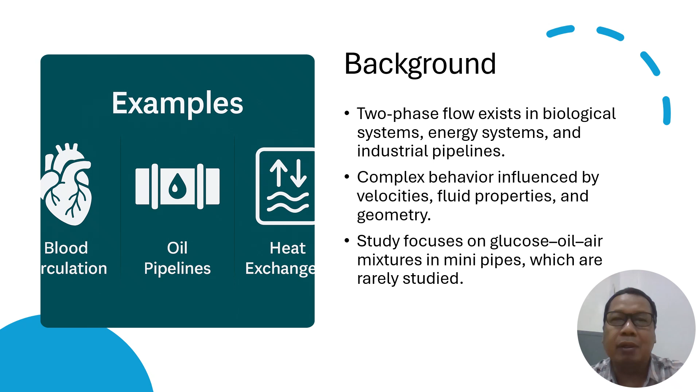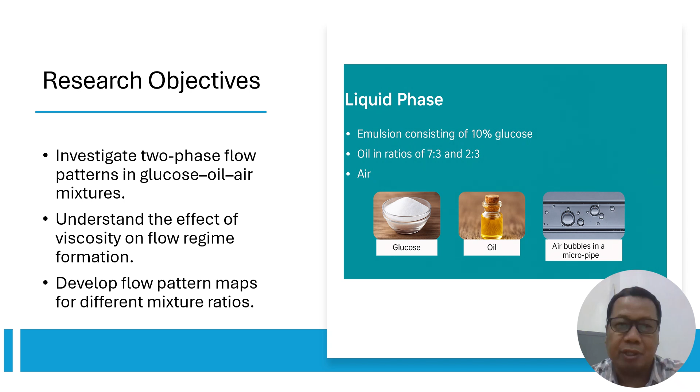In this study, we aim to investigate the flow patterns that occur in glucose, oil, air mixtures, understand how viscosity affects the formation and stability of flow regimes, and develop flow pattern maps for two different mixture ratios to support future microfluidic applications.

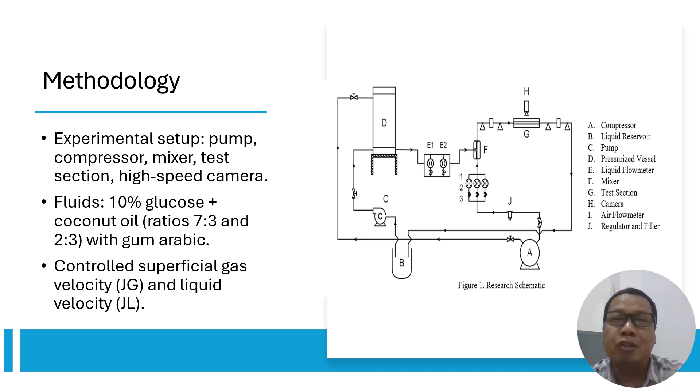Ladies and gentlemen, our experiment involves a detailed setup that includes a pump, compressors, mixers, test sections, and a high-speed camera for visual observations. The working fluids were emulsions of 10% glucose and coconut oil with two volume ratios, 7:3 and 2:3, stabilized using gum arabic. We carefully controlled superficial gas velocity and superficial liquid velocity to capture a range of flow patterns.

Ladies and gentlemen, our results showed that the 7:3 mixture exhibited a wider range of flow patterns, including plug, bubbly, slug annular, annular, and churn flow. And the 2:3 mixture displayed only plug, bubbly, and slug annular patterns. This indicates that higher viscosity in the 2:3 mixture reduces the diversity of flow regimes.

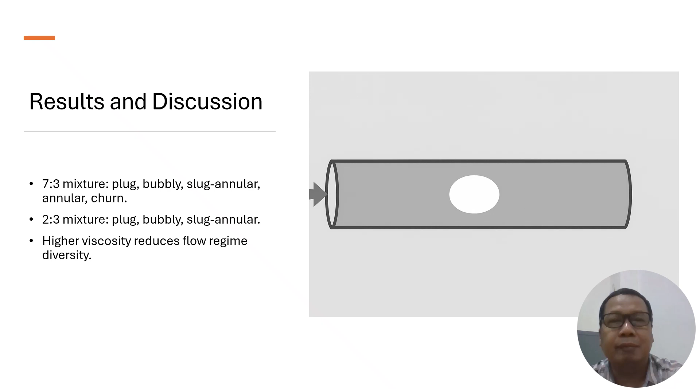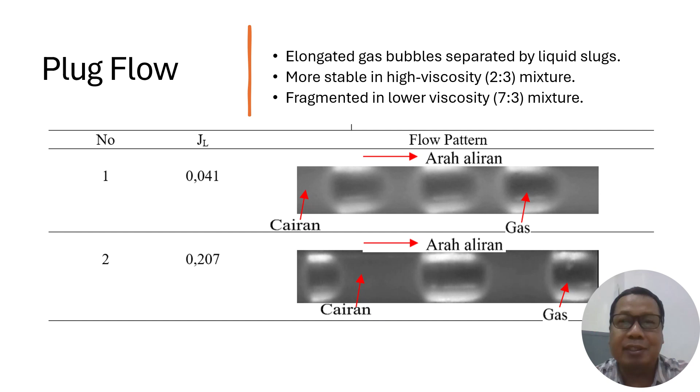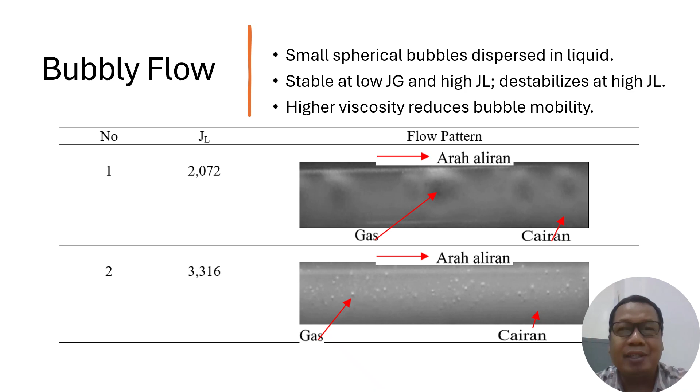In plug flow, elongated gas bubbles are separated by liquid slugs. This flow was more stable in the high viscosity 2:3 mixture and more fragmented in the lower viscosity 7:3 mixture. Ladies and gentlemen, bubbly flow consists of small spherical gas bubbles dispersed in the liquid phase. It was most stable at low gas velocity and high liquid velocity. However, as the liquid superficial velocity increased further, the flow became unstable. The high viscosity of the 2:3 mixture also reduced bubble mobility and visibility.

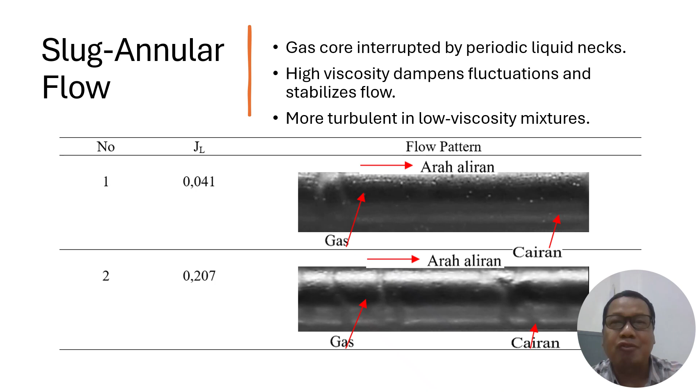Ladies and gentlemen, in slug annular flow, a continuous gas core is interrupted by periodic liquid necks. This flow became more stable in the 2:3 mixture due to viscous damping. In contrast, the 7:3 mixture displayed more turbulent behavior.

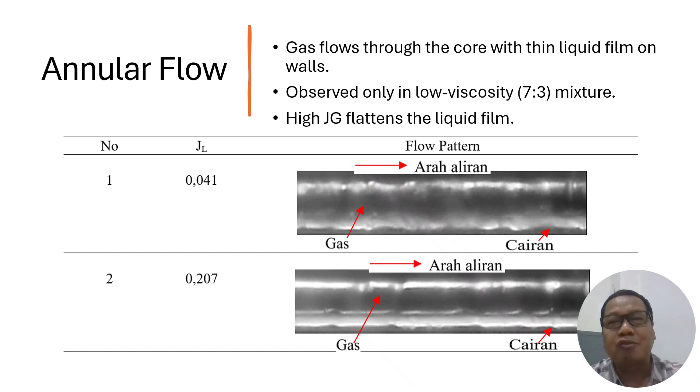Ladies and gentlemen, annular flow was observed only in the 7:3 mixture. Here, gas flows through the center of the pipe, with a thin film of liquid along the walls. At higher gas velocities, the liquid film was further flattened, indicating stronger gas dominance. The 2:3 mixture, being more viscous, did not exhibit this pattern.

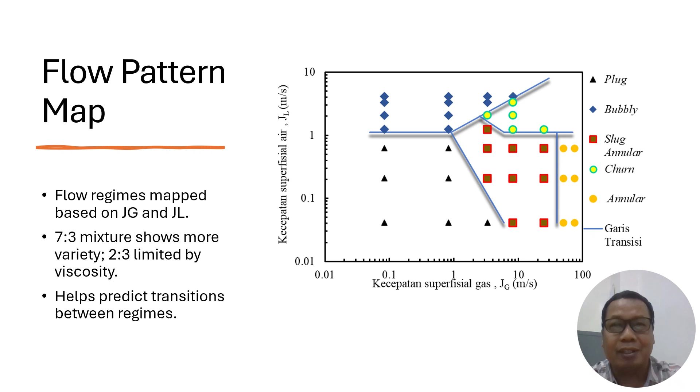Ladies and gentlemen, we created flow pattern maps based on the superficial velocities JG and JL. The 7:3 mixture showed five flow regimes, while the 2:3 mixture showed only three. This map provides a visual presentation of regime boundaries, useful for predicting transitions in multi-phase systems.

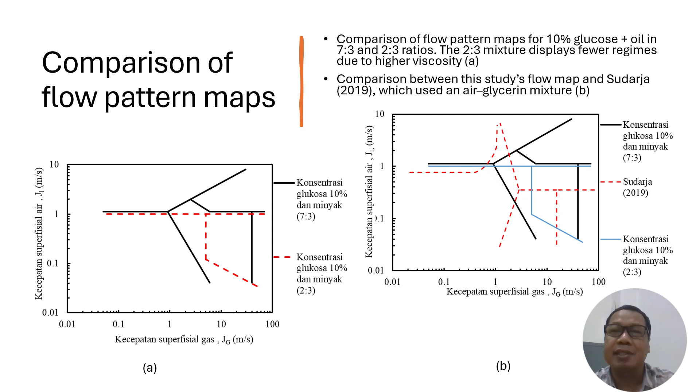Ladies and gentlemen, when we compare the two mixtures, the 7:3 ratio supports a broader range of flow types, and the 2:3 ratio, due to higher viscosity, shows limited regime diversity. We also compared our findings to a previous study using air-glycerin mixtures and found our emulsions provided more defined plug and bubbly zones, emphasizing the importance of fluid selection in microfluidics design.

Ladies and gentlemen, our findings have significant implications in the biomedical, chemical, and food processing industries. Understanding how viscosity affects flow regimes can lead to more stable and efficient designs in microfluidic devices, drug delivery systems, and emulsion processing.

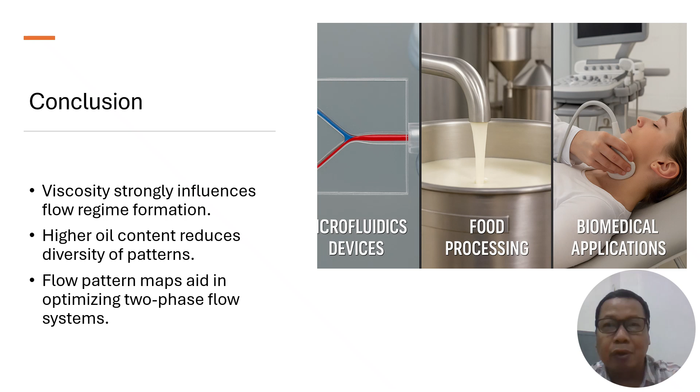So, in conclusion, viscosity plays a critical role in flow pattern formation. Higher oil content and therefore higher viscosity reduces the diversity of flow patterns. The flow pattern maps developed here can aid in the design and optimization of two-phase flow systems in miniaturized applications.